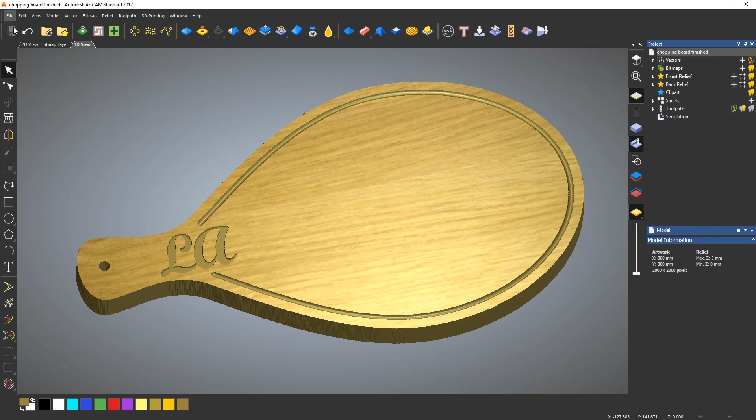So I've got a file that I've already created. So let's open and let's choose this chopping board start. So this is just all about toolpaths. I'm not talking about actually designing things. So that will open up in the 3D view. If you want, you can switch to the 2D view.

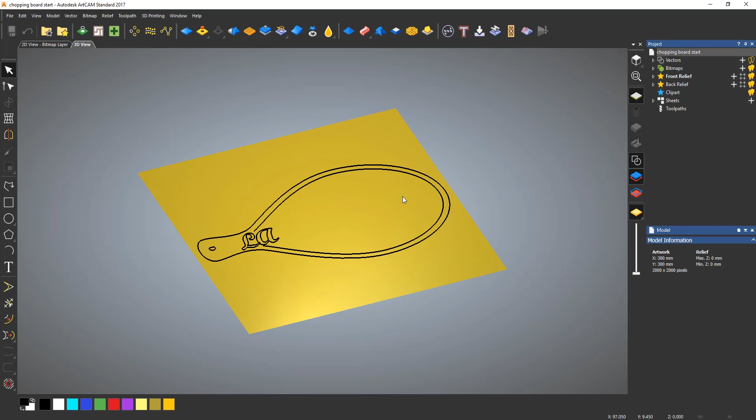Now, the trouble with doing this in the 2D view is that you can't rotate it around and you can't actually see what depth this is going to. So what I tend to do is switch to the 3D view and then rotate it around. And that way, when you create the toolpath, you can actually see the toolpath in red, and you sort of get used to actually seeing how the toolpath looks, and you can see how deep it actually goes.

So the first thing that you need to do in your own mind when creating the toolpaths for this part is to decide how you want to go about machining this. Now, the main thing that you probably want to do is to cut the part out last. Now that may sound pretty obvious, but I've seen lots and lots of people cut the part out first and then decide to machine all of the other bits. So what happens is the part flies off the machine and hits a wall or something. That's because it's not held in the material anymore. So normally what you would do is cut the part out last.

Now this particular piece I'm not really that fussed about. I'm going to cut the part out last, but any of the inside bits that are on this I'm not really too bothered, so I'm just going to play it by ear. So maybe the first thing that I'm going to do is to sort out this hole for hanging the chopping board up. Now I did mention that I threw a few curveballs in here.

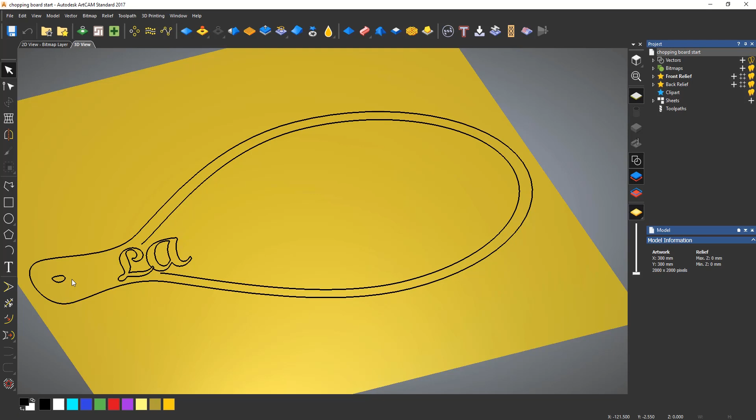One of them, if I take a plan view of this and zoom in on the hole, is that that's not circular, it's just been drawn freehand. And that's not a problem. I'll show you how you can get around that, how you can drill that. So the first thing to actually create the toolpaths is that you need to go to the Project menu and select Toolpaths, and that will open up all of the toolpaths below the splitter bar.

Now you'll see that there's actually a section called 2D Toolpaths. Now in this demonstration we're just going to focus on a few of these toolpaths. These are the toolpaths that you will probably use the most. Now if you haven't got this, if you happen to lose this, a lot of people do this. They accidentally click on the cross or something and then lose it, and don't know how to get that back.

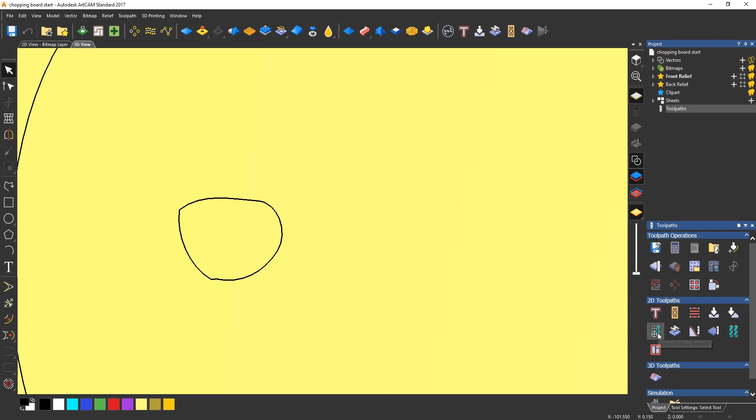If you ever do that, all that you need to do is go to Window and select Reset Layout. And that will completely reset the layout and bring it all back. So don't worry if you do that. So the first thing that we're going to do is drill this hole. Now, the drilling toolpath is located underneath the profile toolpath, so it's the second one down under 2D. So if I select that, that will open up a new dialog box. Now the first thing that I'm going to do with this is come down to the bottom and set up my material. So if I select that, let's just open this out a little bit.

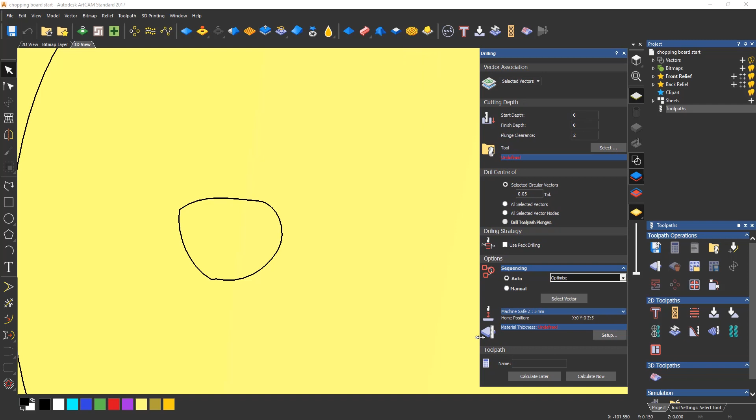And you can see that I've already set this to be 15 millimeters because I've done this earlier. And I want the material Z0 to be at the top. So dependent on how you set your machine up, if you set your Z0 at the top of the material or at the bottom, just determines which one of these you actually choose. And the material thickness is the thickness of the material that you have on the machine. Okay, so I'm going to say that this is 15.

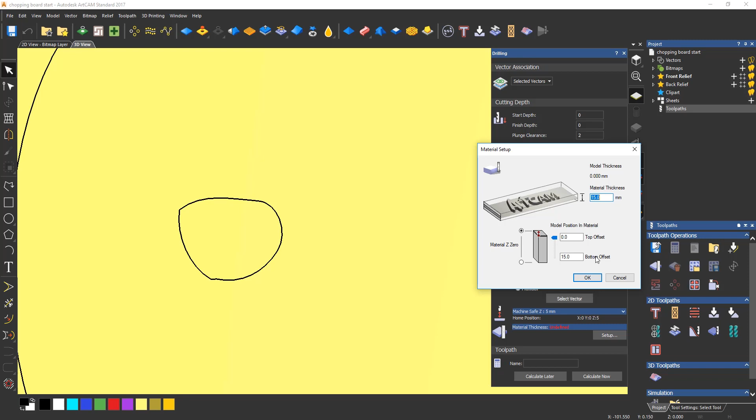Now, as soon as I do this, it will zoom out and it will create this material block in a translucent blue. Okay, so let's zoom back in on that circle, or what wants to be a circle, and let's select it. Okay, and you can see that I've got a start depth and a finish depth.

Okay, now this is just a basic demonstration. I'm not going to go into all of the specific options. That's going to be in part 2. Okay, we're going to take a look at a few more detailed options. That's going to be probably in about a month's time.

Okay, so the finish depth, let's select that, and I'm going to do that to 15, so it's going to cut all the way through. Now the tool that I want to select, click select. This is what you will be greeted with when you start the program. Okay, so I'm going to go into metric tools. Let's go into wood or plastic.

And then I've got roughing and 2D finishing, 3D finishing, V-carving. Now the V-carving, Ogee, raised panels, these have just got specialist form on there. I'm not going to touch these in this demonstration. I'm just going to be concentrating on roughing and 3D finishing. Okay, now the roughing and 2D finishing contains end mills. So these are just your standard sort of straight walls, flat bottomed tools.

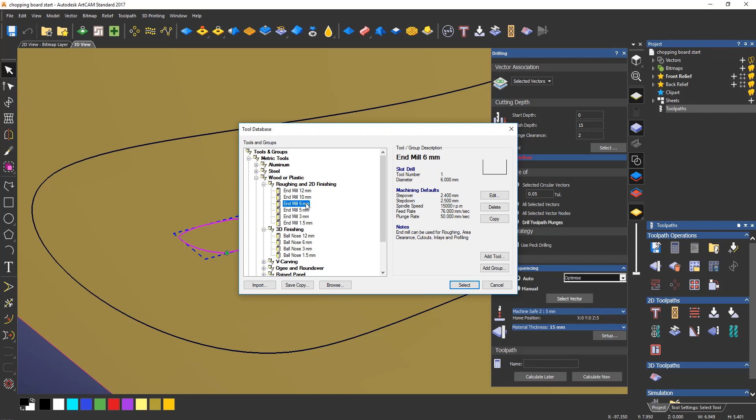Okay, so let's choose the 6mm end mill. And you can see that that's been selected there. Now the default for this is to drill the center of, and it says selected circular vectors. Now obviously this is not a circle, so what I need to do is select all selected vectors. So this is just going to find the center of this vector that I have here. Okay, and then when I've got that, click calculate now.

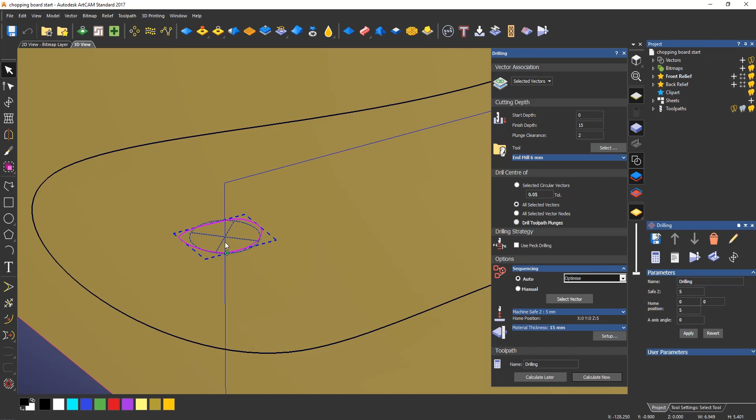Okay, now you can see that it's put a crosshair in the center of the vector, and it's also given me these two lines. Now if I zoom out and take a look at these, you can see that that's coming from the center and it's coming across and then it's going down. Now, this is what we call a rapid move. So basically the tool is coming across really fast until it gets to this point and then it's plunging down into the material. Now you can control that by this machine safe Z.

So if I open that up, you can see that the safe Z is set to 5mm above the top of the material. So if I was to set that to say 25mm, just to show you, and then calculate again, you'll see that it's moved up.

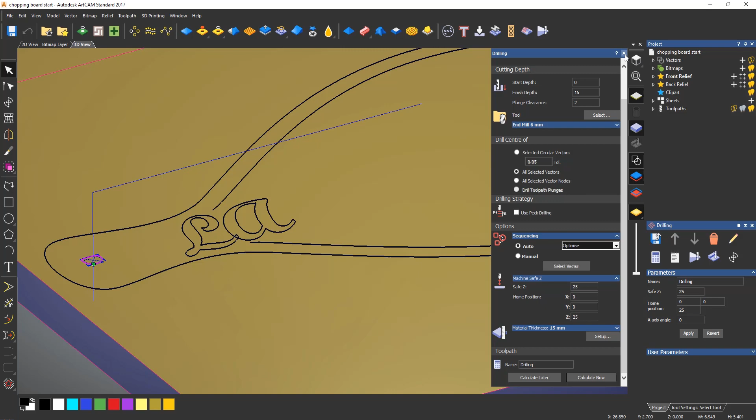Okay, so now it's 25mm high. Okay, so let's close that. And let's actually take a look at the toolpath. Where has the toolpath gone? I've created it. I don't know where it actually is. Now, it is hiding underneath the toolpaths.

So if I open up this arrow, you can see that I've got a drilling toolpath. And I can also open up that arrow to denote a drop-down menu. And you can see that I've got this 6mm end mill. Now I can actually select that and it will give me all of the parameters that I can change rather than having to go back into the toolpath to actually change these. So if I want to change, let's say, the spindle speed, I can just change that there.

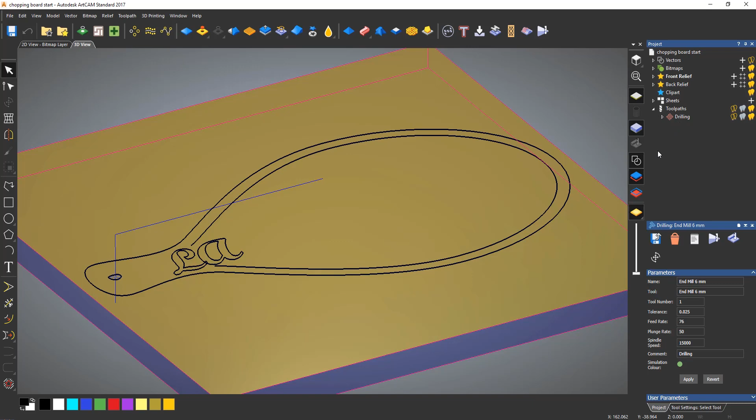Now there's also the simulation color. I'll explain that in the next part that we're actually going to be machining. Okay, so that's basically the drilling. Okay, now let's take a look at this personalized LA. Now if I want to get this blue line out of the way, I can do that by selecting the light bulb. So I can turn off that light bulb. This is the 3D visibility on the far right. This one is the 2D wireframe. And I'll explain what this one is, the 2D simulation, in a moment.

Okay, so this one, I want to machine this to a depth. I want to basically create a pocket. So I want to machine all along the inside of this LA. Now I can do that by selecting Toolpaths, and then I can go down to Area Clearance. So this is basically blasting a lot of the area away. So if I select that, much the same sort of dialogue. Let's enter a finished depth. I'm going to do that, let's say 1mm for this.

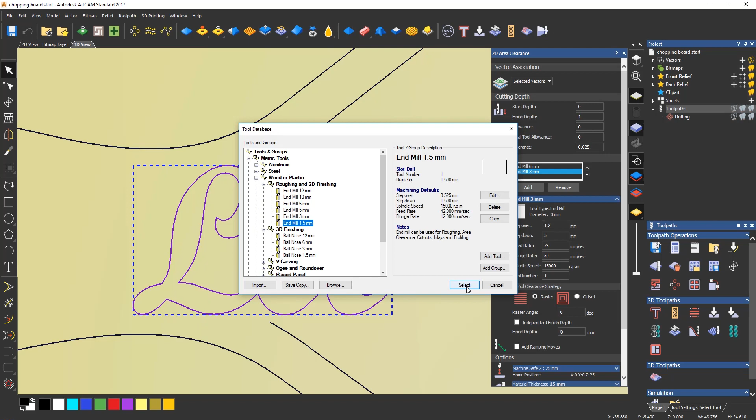And you've got a tools list with this one. So this allows you to add more than one tool. Okay, so let's add some tools. So I'm going to add the 6mm, and I'm going to add a 3mm, and I'm also going to add the smallest tool that I have by default, the 1.5mm. Now, at the moment, they are all set to machine. The clearance strategy is raster.

Now, that's probably not really great for this particular piece, because what will happen is it will come across the bottom of the A and then jump up and go back to the other side, jump up, go and do the L. So I'll have a lot of retracts and plunges. It will take probably twice as long to actually do this. So it's better for this example to create an offset. This will basically offset the shape inwards and just follow it around. Now I want to do that for each of these. So let's just change each one to offset. Okay, and when I've done that, I can select calculate now.

Now what will happen is the 6mm may not be able to actually get in there. It may be too big, so it may not even create a toolpath. The 3mm will machine. The 1.5mm will go in the areas where the 3mm couldn't actually get. So it does what we call rest machining, just 2D rest machining. I'll explain a bit more about that in a moment when we look at the simulation. Okay, so for now, I'm going to select calculate now.

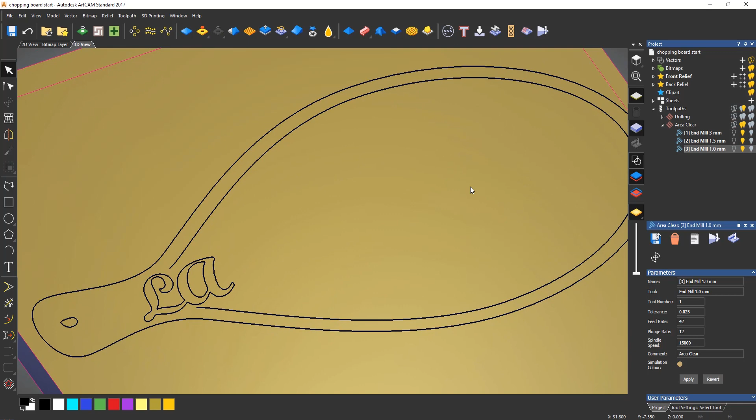Go back to the 3D view. Let's rotate this around, like so. And if you right click on the toolpath, you can just select simulate toolpath. And it will give you a simulation. Let's just turn this off. You needn't worry about that.

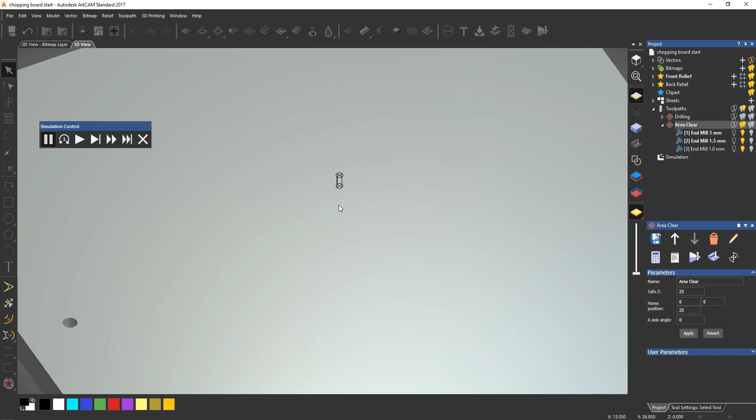Let's select this one, and I'm going to use the simulation control bar this time. What this does, it creates a tool, and then you can play what it's actually doing. So this is the next tool. I can play that, and the next tool, I can play that. And I can actually take a look what this is actually machining. Okay, so that's another way of simulating.

This is probably the most common way that you would simulate. The other way is just a 2D representation. Basically, I use that for area clearance. Okay, so when you've done that, you can delete the simulation. And what you'll notice is that when you delete the simulation, you lose the vectors. So what you need to do is select toggle vector visibility. Okay, so they've not been deleted, you just can't see them.

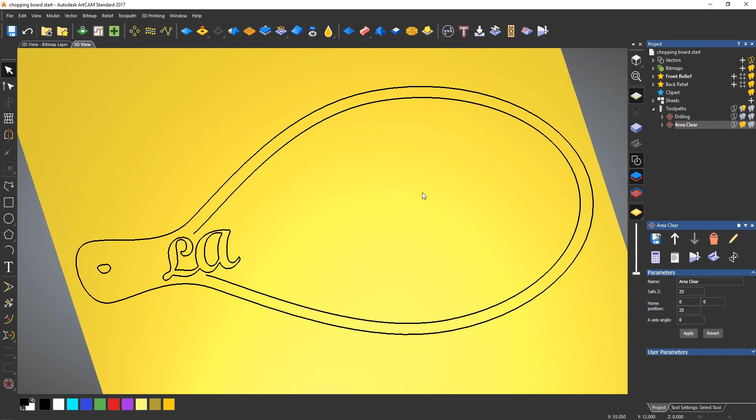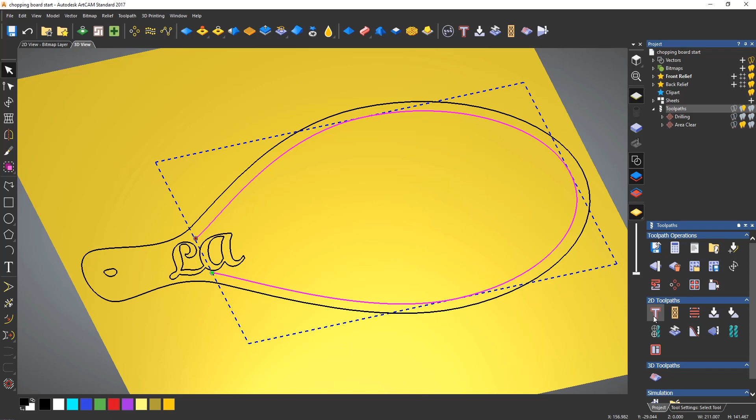Okay, so now let's create, let's say, this groove. I want a groove to go around the edge of the chopping board, the inside of the edge there. So let's go to Toolpaths, and I can do this by creating a profile. So if I select profile, now what you would normally use this for is to actually cut the part out, and we'll be using it in a moment to cut it out. But for this, I'm going to show you how to actually create a groove.

Okay, so the first thing, it says profile outside. Now, we don't want to profile outside. We want to profile along. So we want to basically go along this line. Okay, and the finished depth, it automatically assumes that you want to cut the part out. Now, in this case, we don't. So the finished depth, I'm going to do this as 1.5 millimeters.

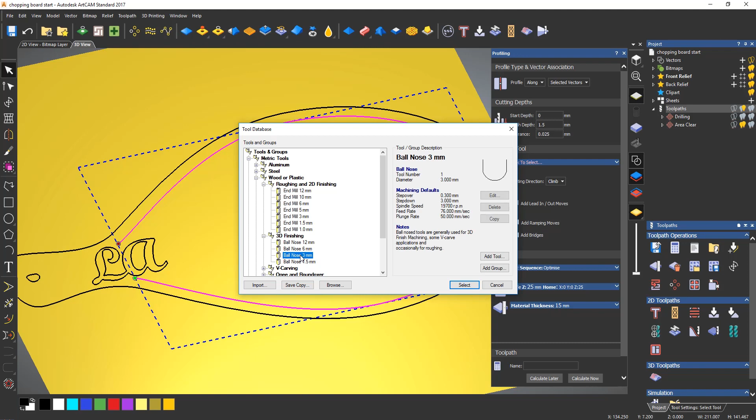Okay, now the reason that I've done that is because I want to use a tool that's got a bit of a shape on it. So I'm going to use a ball nose cutter. Okay, and the one that I'm going to use is 3 millimeters. So half of that, 1.5, would give me a perfect 1.5 radius on the corners. Okay, so as I said, you just need to think about things a little bit when you actually machine them. So let's use this 3 millimeter ball nose. Select that. I'm not going to change any other settings. That's going to be in a later demonstration.

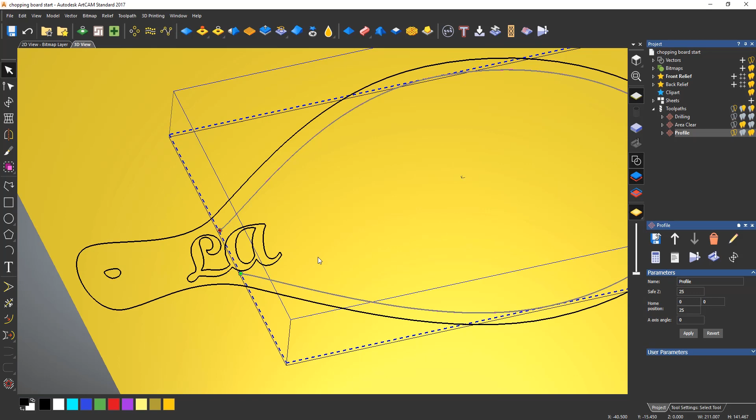And select calculate now. Now, as I mentioned before, you can see that underneath there's a red toolpath that's gone a little bit deeper. Now, that's why I like to do everything in the 3D view, because I can actually see how deep it's actually machining. Okay, now I can simulate this. If I want to just simulate everything, just go to the toolpaths and select simulate all toolpaths. Okay, and that will give me a simulation.

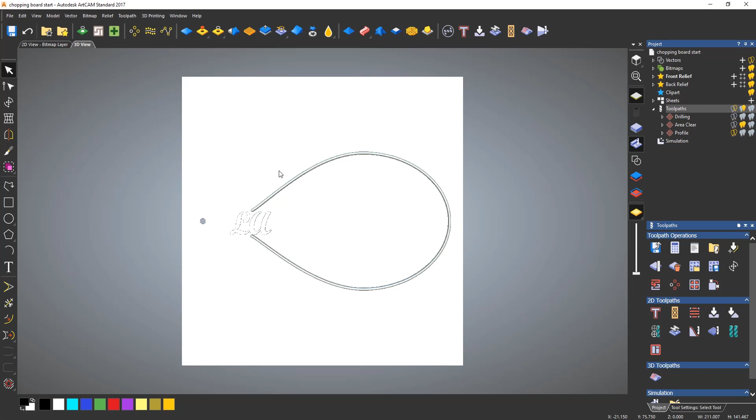Now that looks fine at the moment, but I know that I've got another problem. If I take a look at the top, you can see this groove is really, really close to the A. And to be completely honest, if I was to machine that, I reckon it would probably break out, not look too great. Okay, so what I'm going to do is edit this toolpath, and I'm going to recalculate it.

Now, what I need to do is basically make this shorter, and I can do that by something called node editing, really easy. There are lots of ways to do this. I could create a line down vertically and just trim it off if I wanted to, but a really quick way is to go into node editing, and that will give me all of these points. Now, if I hover over the middle of one of these, right click, you can see that I've got some extra options.

One of those options is remove span. So if I select that, it just removes that section. And the shortcut for that is R. So I can just remove that. Now, while that's all selected, I can calculate. And then if I just close that, let's reset the simulation. Simulate all toolpaths. You can see that it's coming a lot shorter. Okay, so that's how you basically can modify the vectors whilst you're in the toolpath.

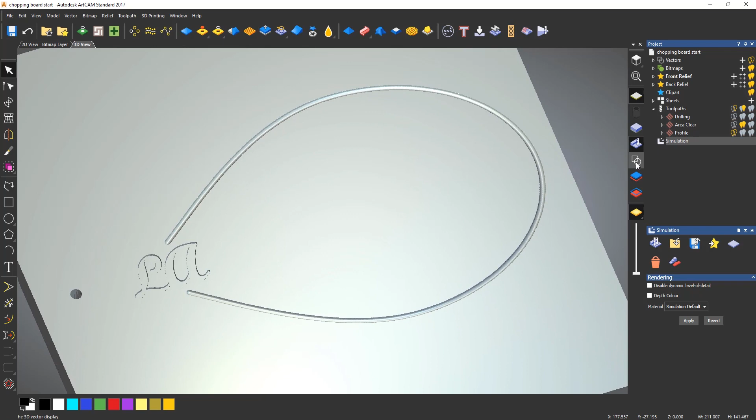Okay, so we can leave the simulation on. You can do it with the simulation on, it doesn't make a difference. Let's just toggle the vector visibility back on. Okay, so I can see my vectors, I can machine them. So let's select the outside. This time, create another profile. This is going to go on the outside to a finished depth of 15. Select a profiling tool. To cut the part out, I'm just going to use the largest tool that I have.

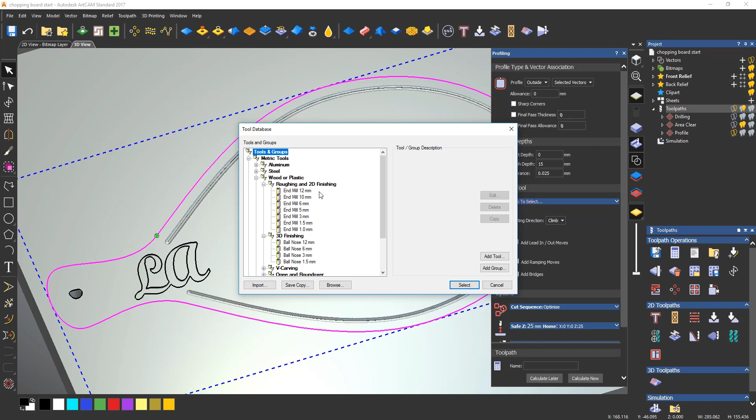And then select calculate now. And you can see that this is machining this. Now you can see that it's doing this in 2 passes, so there's 2 lines here. If I wanted to change how far down it actually steps, I can change the step down here. Okay, so let's say that I wanted to change it to, let's say, 2.5mm cuts.

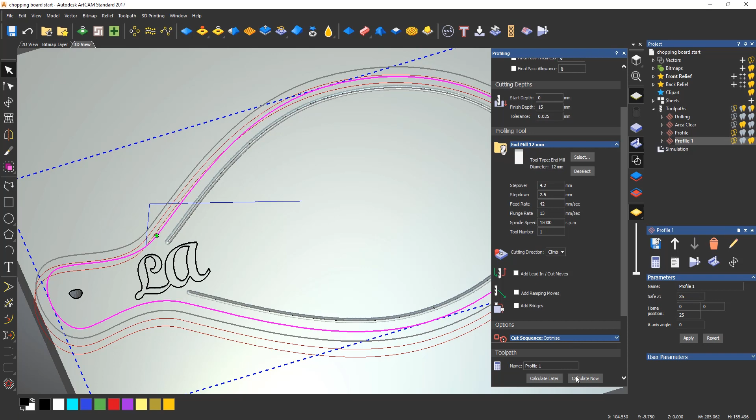And you can see that it's doing a few more cuts there. Okay, so that's how you change basically how deep you want to machine it. So let's simulate that one. And you can see that it's cut the part out.

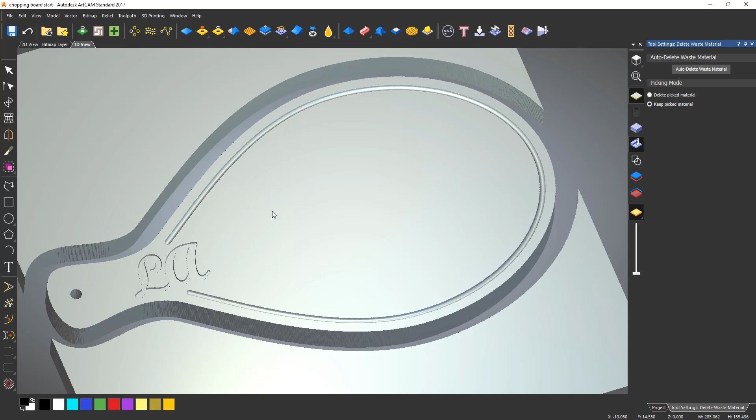Okay, now if you want to get this to look like how I had it at the very beginning, the way that you do that is just select simulation, select to delete the waste material here, and then for this piece, this is pretty easy. You can auto delete the waste material, or you can select keep picked material. Now when you select that, if you just select the material to keep, it will just keep that and delete all of the rest. Okay, and then I can close that, and let's change the material.

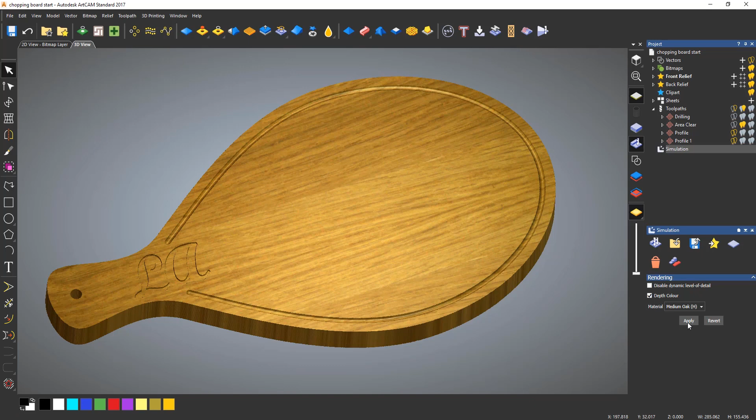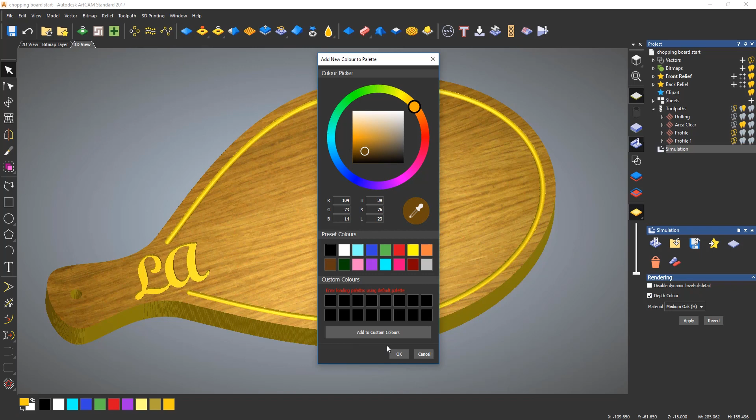Maybe let's do this medium oak and apply, and then let's add a depth color, and that basically colors in anything that's been cut to a depth, and you can just change that to whatever you like on here. Now if you want to, you can add a color. Maybe I want it to be a darker color from the oak. I can select the color picker here and then just move over, maybe get the darkest color that I have, maybe that one. Select OK, and that changes the color to that color.

Okay, so that's all of my machining done. Everything looks fine. Only thing I need to do now is send this to my CNC machine. Now to do that, really easy. All that you need to do is go to Toolpaths, and then the first option is Save Toolpaths. So select that, and you'll have all of your toolpaths listed on the right hand side. Now what you need to do, especially if you have a single headed machine, you want them to be separate. Save toolpaths to separate files.

Okay, and I normally append the toolpath details to the file names. So this basically puts all of this detail into the file name, so I know what it actually is. Let's browse to a folder. Let's say here, this is the folder I have. Select open. The machine file format. Now this is probably the most important part. Now these are what we call post processors.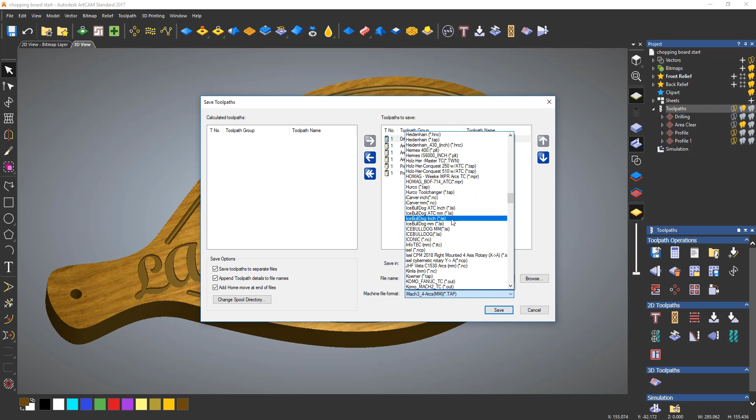Now don't worry if you're not sure what a post processor is. It's just basically a converter that converts the information from ArtCAM into information that your CNC will understand. That's all that it does. So most CNCs will be listed under here. A lot of CNCs nowadays are just G code, or you could use maybe the Mach3. A lot of people use that, that we have there. That's all that you need to do. Just select the one that you want to use and then select save. And that's it, you're done. Okay, I can cancel that.

Let's minimize this. Go to the 2D Toolpaths folder that I have, and you can see that I've got all of these documents. So if I open up one of those, let's say that one, you can see that it contains all of this information. Now these are just coordinates, basically tell your machine what to do. And you just need to take these, maybe put them on the stick or over the network, and then stick them into your machine, and off you go. And then you machine that part. Okay, so that brings an end to the demonstration.